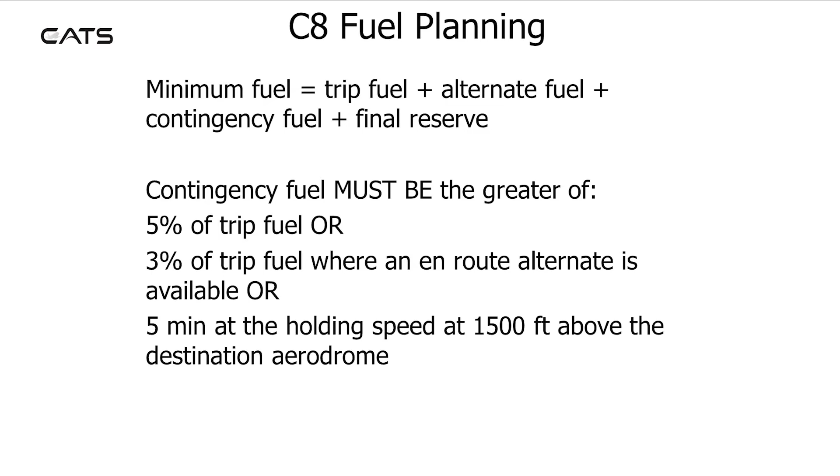For example, the trip fuel for a jet aeroplane to fly from the departure aerodrome to the destination aerodrome is 5,350 kilograms. Fuel consumption in holding mode is 6,000 kilograms per hour. The quantity of fuel which is needed to carry out one go-around and land at the alternate airfield is 4,380 kilograms. The destination aerodrome has a single runway. What is the minimum quantity of fuel which should be on board at takeoff?

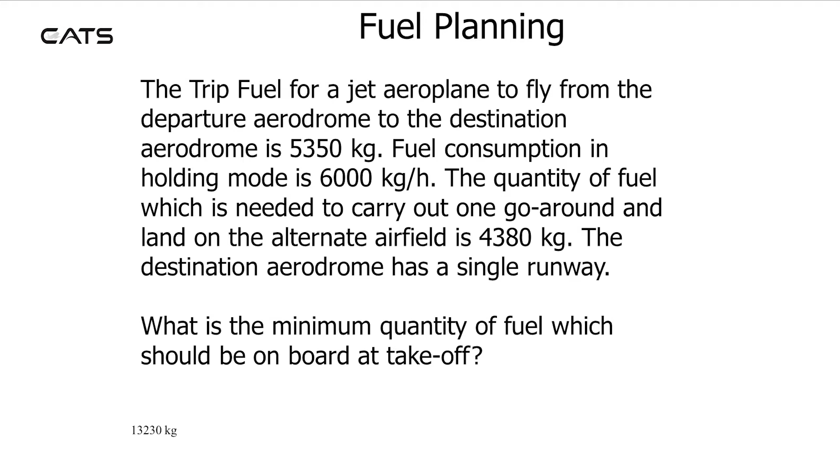Well, the trip fuel is 5,350 multiplied by 5%, which is 267.5. Alternate fuel is 5 minutes at 6,000 kilograms per hour, which is 500 kilograms. The final reserve is 6,000 for 30 minutes, which is 3,000 kilograms. Minimum fuel is therefore 5,350 plus 4,380 plus 500 plus 3,000, totaling 13,230 kilograms.

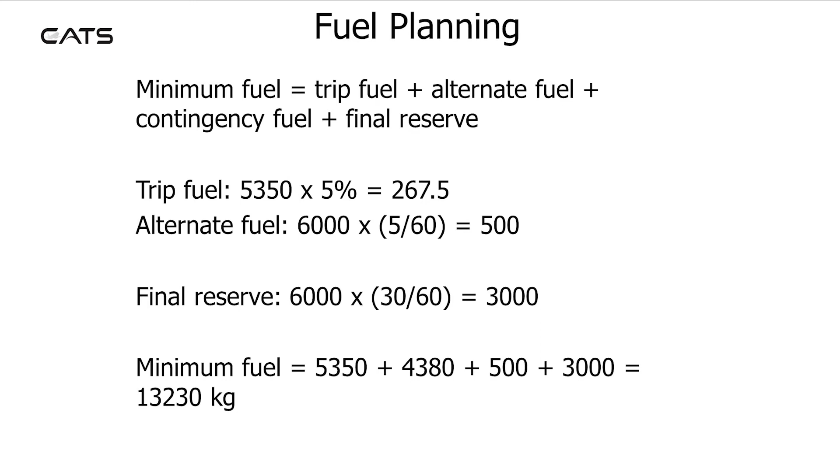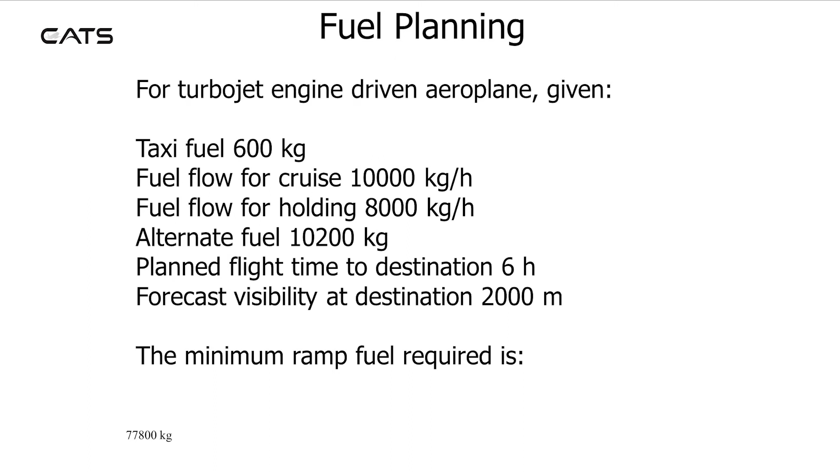For a turbojet engine driven aeroplane, given taxi fuel of 600 kilograms, fuel flow for the cruise of 10,000 kilograms per hour, fuel flow for holding 8,000 kilograms per hour, alternate fuel of 10,200 kilograms, planned flight time to the destination of 6 hours, and a forecast visibility to the destination of 2,000 meters, what's the minimum ramp fuel?

Well, the taxi is 600 kilograms. Trip fuel is 6 hours at 10,000 kilograms per hour, which is 60,000 kilograms. The contingency is 5% of trip fuel, or 5 minutes at holding speed, whichever is the higher. 5% of trip is 3,000 kilograms. The alternate fuel is 10,200 kilograms. The final reserve, 30 minutes holding, is half an hour at 8,000 kilograms per hour, which is 4,000 kilograms. And adding all these up results in 77,800 kilograms.

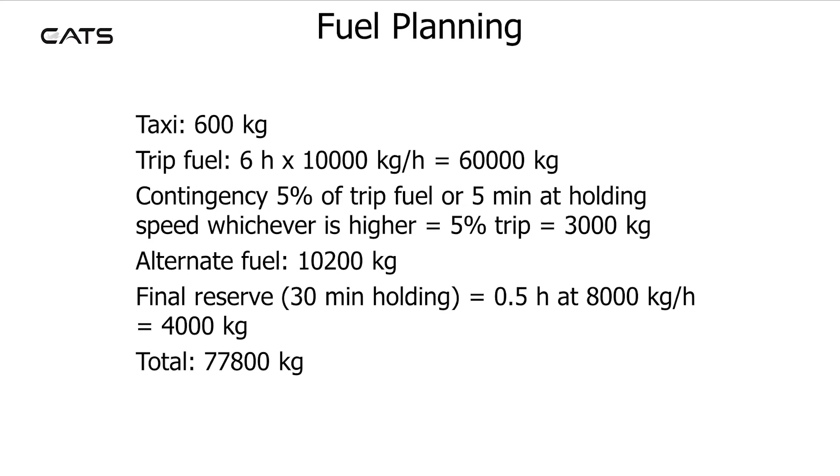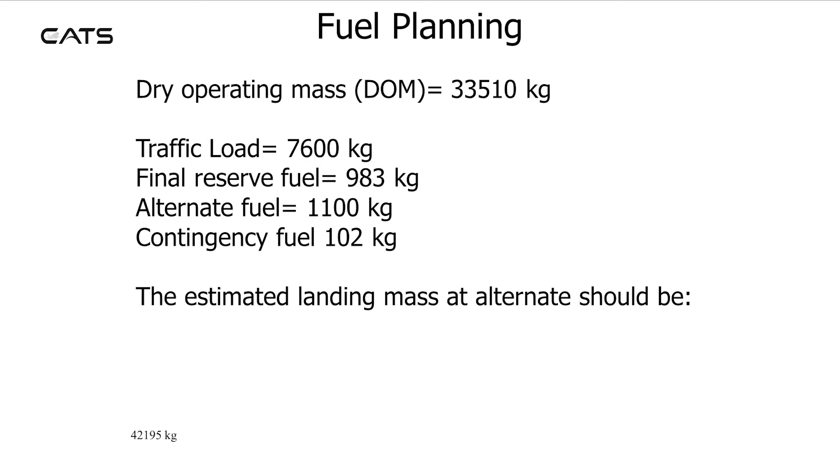The dry operating mass is 33,510 kilograms. Traffic load is 7,600 kilograms. Final reserve fuel is 983 kilograms. The alternate fuel is 1,100 kilograms. Contingency fuel is 102 kilograms. The estimated landing mass at the alternate, when calculated, is 42,195 kilograms.

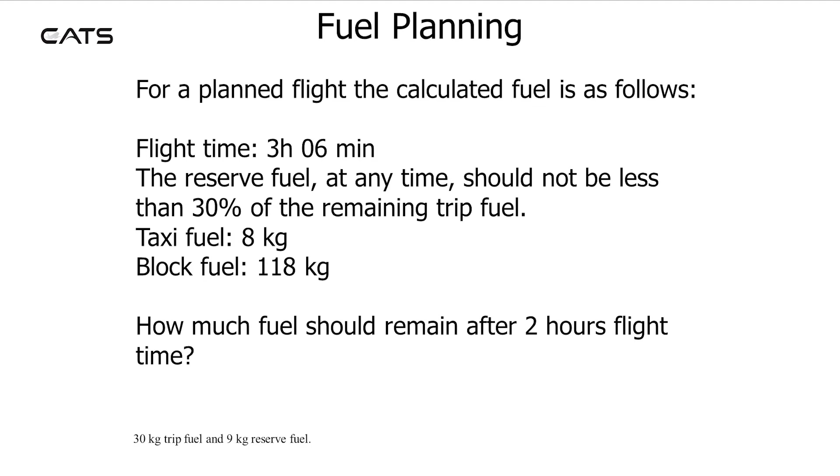For a planned flight, the calculated fuel is as follows. Flight time 3 hours 6 minutes. The reserve fuel at any time should not be less than 30% of the remaining trip fuel. The taxi fuel is 8 kilograms and the block fuel is 118 kilograms. How much fuel should remain after 2 hours of flight time?

As the flight progresses, trip fuel and reserve will both decrease. Assuming that at landing all the fuel is used, no trip fuel remains, therefore there's no reserve needed. The trip fuel at takeoff is 118 minus 8, which is 110 kilograms. That's minus the taxi fuel. 110 divided by 3 hours 6 minutes results in a fuel burn of 35.5 kilograms per hour.

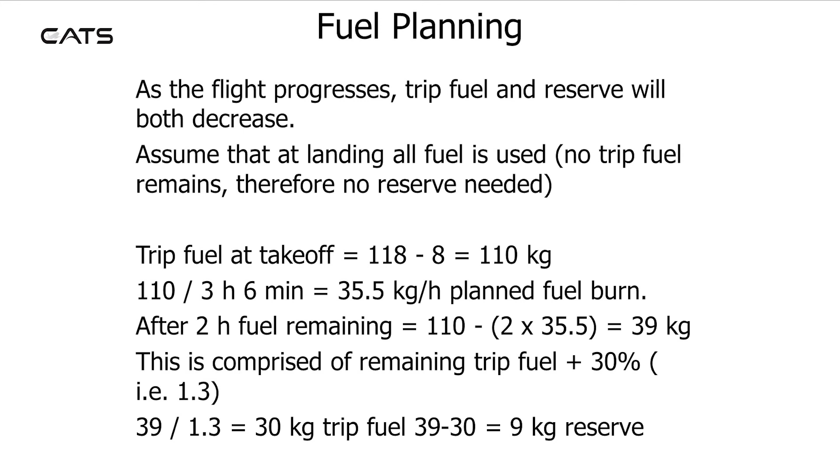After 2 hours, this will be 2 multiplied by 35.5, which is 71. Subtract this from the 110 to get 39 kilograms. This is comprised of the remaining trip fuel plus 30%, i.e. 1.3. 39 divided by 1.3 equals 30 kilograms of trip fuel. Subtract this from the 39 kilograms of fuel at 2 hours, therefore 9 kilograms is the reserve.

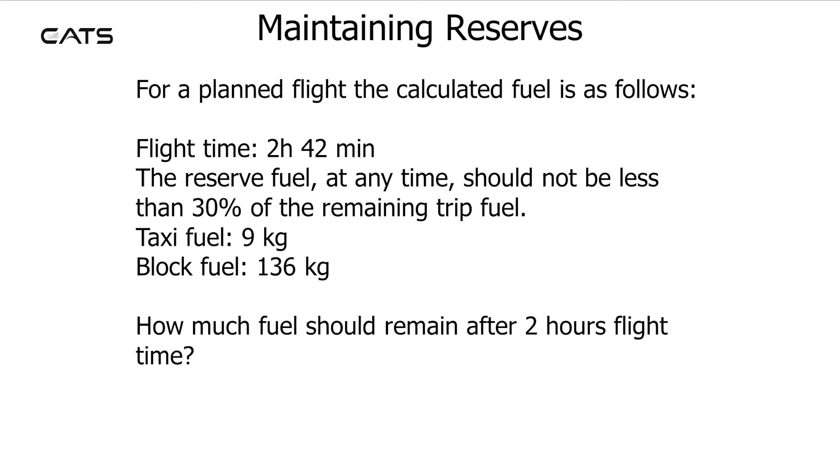Another question on maintaining reserves. For a planned flight, the calculated fuel is as follows. Flight time 2 hours 42 minutes. Reserve fuel at any time should not be less than 30% of the remaining trip fuel. Taxi fuel is 9 kilograms, block fuel is 136 kilograms. That's the fuel on the stand, on the blocks, so to speak. How much fuel should remain after 2 hours of flight time?

Well, the trip fuel will be 136 kilograms minus the taxi fuel, which is 127 kilograms. 127 divided by 2 hours 42 minutes results in the fuel burn of 47 kilograms per hour. After 2 hours, that will be 94 to be subtracted from 127, which will leave 33 kilograms. Divide this by 1.3 to find out the trip fuel of 25 kilograms. Subtract this 25 kilograms from the 33 kilograms to find out the amount of the reserve, 8 kilograms.